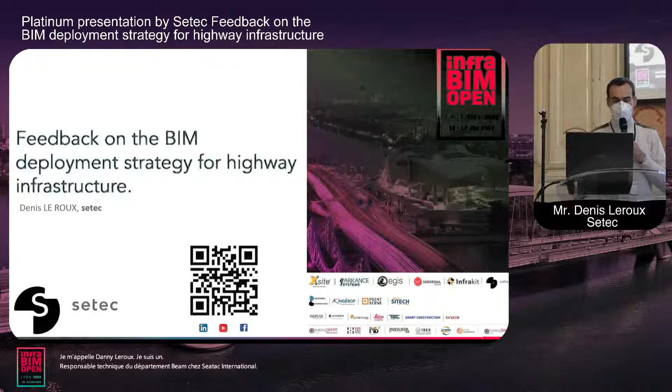So, first of all, who is Setec and what are we doing? Setec is an engineering company based in France, but we operate everywhere in the world, abroad. Our main aspect is that we always want to have value engineering and a new inventive way of doing things. We operate in transport and infrastructure, like bridges, highways, tunnels, metro, airports, and so on, and also in building, urban and land development.

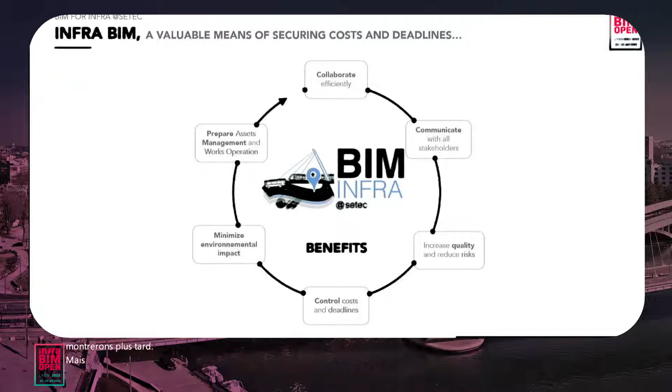So what's our strategy in BIM? Our strategy is to focus on the benefits of the project. This is feedback - we didn't start like this. We wanted to do BIM because we wanted to do BIM with a lot of things, you will see that later. But with experience, we really see that you have to focus on what kind of benefits you want from BIM on a specific project, and sometimes very little things can do a lot. So we have to focus on different aspects or topics: collaboration, interaction between people, life cycle, operating and maintenance, and so on.

Here, the client will begin a new project, okay? And then we'll have one or several design offices doing the preliminary design, then the scheme design - that's where we will do BIM models. But then we will have the contractor, and the contractor will have to redo the BIM model. So we have a big disruption, a big stop into the BIM process. This is very painful in many ways for BIM, okay, but that's it, that's how it works. So we have BIM models for designers and BIM models for contractors, and they are not the same, and we cannot give them the actual BIM model.

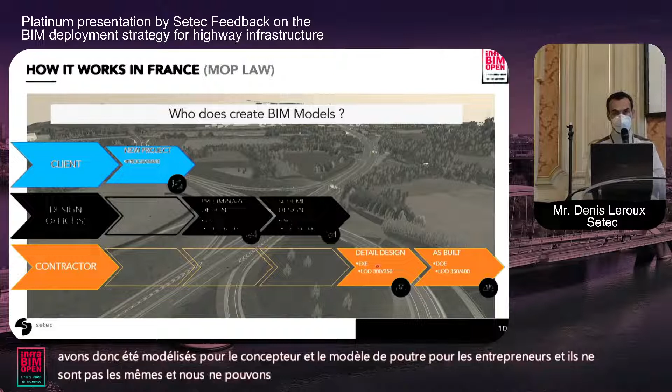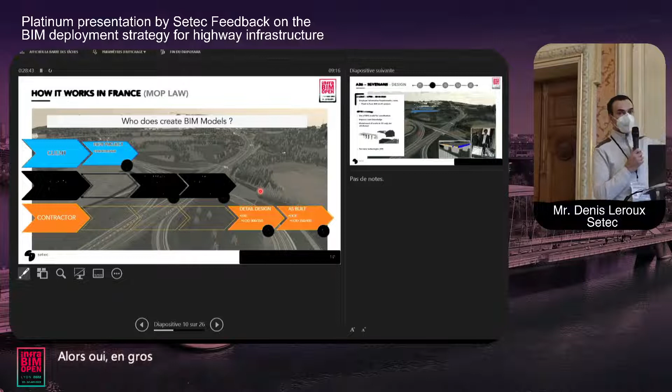They have to redo it. Oh come on, okay computer is down. Oh thank you very much, nice one. But wrong screen. So yes, basically we have a big stop into the BIM model, so we have to redo it. It costs a lot of time and a lot of money, of course.

The first project I will talk about is one of the first projects we did with a BIM process, from 2010 to 2015, to 2020. The employer's request was, I just want BIM on my project. So that was very vague and we didn't know where to go. So our strategy was to use BIM for collaboration and to improve our team's knowledge on BIM, because we were just beginners, we didn't know where to go. And we modeled almost everything at every stage, like bridges, roads, earthworks, but also landscape and trees and so on. And we wanted to test the BIM model for virtual reality.

The feedback on that is that at the time we didn't have IFC software, so the software were not able to produce IFC. We spent a lot of time translating our CAD model to BIM model, and a lot of 2D software didn't produce actual 3D. For traffic signs, we had to develop specific software to get the traffic sign information to do 3D models from that. That was very painful.

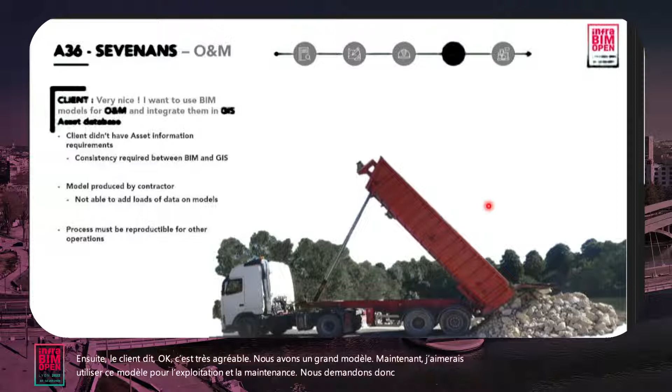Then the client says, okay, that's very nice, we have a BIM model now. I would like to use that model for operating and maintenance. So we asked the contractor to do BIM model during the construction phases. The client wanted as well to use those BIM models into GIS software and GIS database.

At the time, and still right now, the problem is that contractors may not all be ready to produce IFC, or to produce models with enough information or with the level of information required by the client. We did a big job with the client to be sure that all the information we put on the IFC models, the names of information, would be the exact same names we'd have on the GIS database. That was a quite good job for them and for us.

So the process we kept is that every single contractor will produce an IFC, let's say with just geometry in the IFC. Then they will produce Excel files saying that at such project or such part of the project, you have such or such information. Then all that information will be processed with FME, and FME will be based on our asset database, which was an actual Excel file. In that file we had all the information we had to tag into the IFC model. We get the Excel file, check that it's compliant with the database, and then push the data into the IFC.

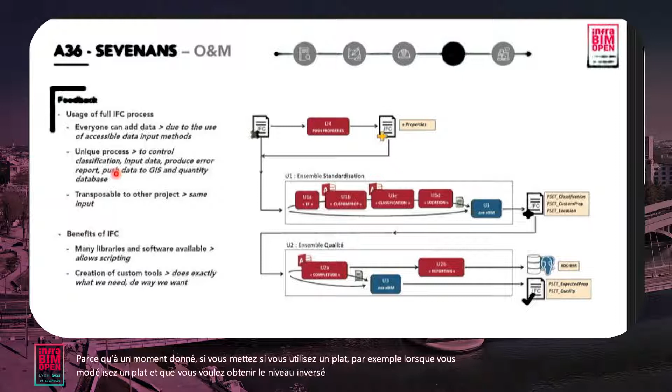At some point, if you use a ditch, for instance, when you model a ditch and you want to get the invert level of the ditch, you may not be able to retrieve it in GIS. It really depends on the way your software codes the geometry of the IFC for the ditch. If you have a BREP, basically you won't be able to get the invert level.

The benefit also of the IFC is that by the time we started in 2015, and this job was done later on, plenty of new community and new operators had to produce libraries to allow us to manipulate IFC in code and to automate processes.

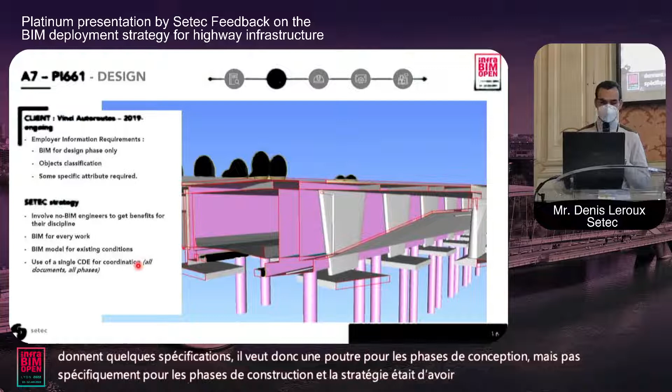Another project is with Vinci Autoroutes in 2019, and it's still ongoing. The project is under construction right now. This is a design process, and our client gave us some specifications. He wants BIM for design phases, but not specifically for construction phases. The strategy was to have a team working and meeting every week around the BIM model.

And also to involve non-BIM users into the BIM strategy, making them think about what BIM can bring to their discipline. Let's say in road pavement, we had a big issue, given the motorway is a two-way motorway, one up, one down.

The location of the project is in a turn, and the two sides of the motorway have a difference of level. The construction phasing for all the material pouring was very difficult because we had to bypass traffic for maintenance on the main bridge. So we had to produce a temporary bridge, route all the traffic there, then go back to the original position. All the pavement strategy and phases was designed with BIM, which worked very well.

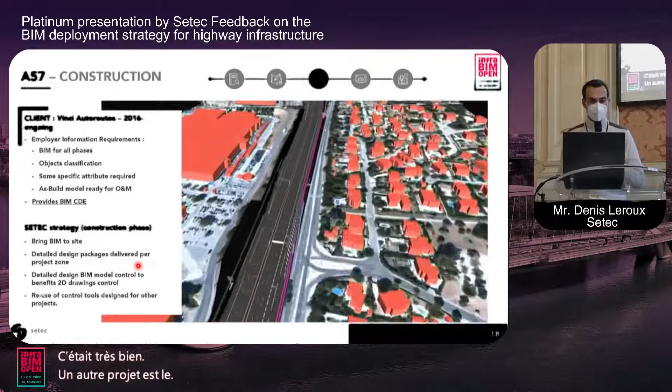Another project is the A57 in Toulon with Vinci Autoroutes. The client on that project provided the CDE. This is a big step for us because usually we had to manage and pay for the CDE, but there, as the client provided it, both designer and contractor were able to collaborate together. Our strategy was to bring BIM on site, and this kind of CDE platform is a big asset, so everyone can go there, look at the BIM model, add comments, and so on.

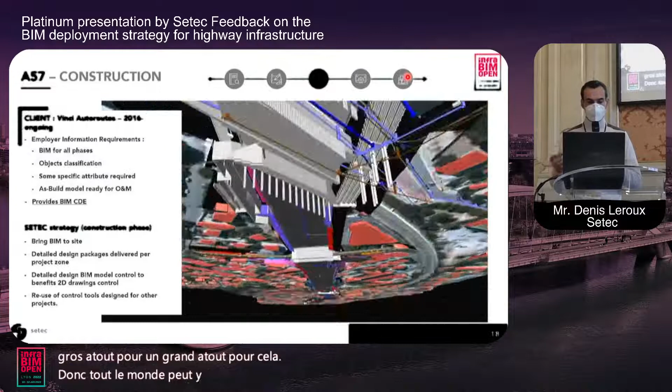We also tried virtual reality on site. This is quite good to be sure that every part of the project is laid at the correct location, and we did some controls that were very interesting with that.

So the feedback is that for detailed design, the use of BIM was very handy for us, because it was a large project with many networks to integrate.

The next step is the as-built model. This has to be done in real time, because if not, the data is lost. The big issue is to be sure you can collect data from site in nearly real time, and get that data to control your BIM model against the land survey of the existing condition on site.

Last thing, virtual reality is good at the start, but you really need someone who is an expert on site to launch that, for about one or two months.

What's next? In all the phases of the project, we see that site data is something very important. So our strategy is to try to think how we can process site data easier and quicker.

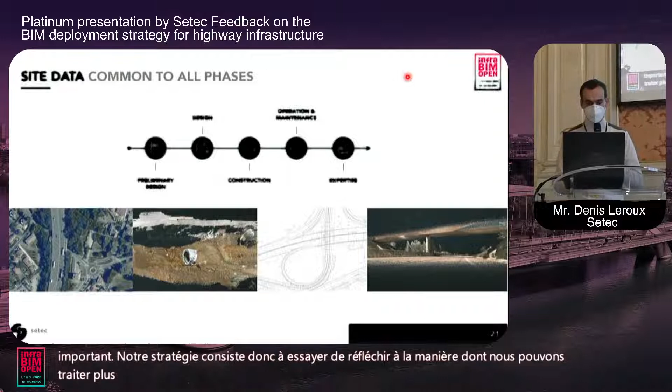To do that, Setec launched an R&D project with a new startup company. This project is based on two areas of knowledge: the startup has the knowledge of treatment of cloud points, and we have the knowledge of engineering, of what we can do with the cloud points and what we want to extract from them. So the project is to have a platform with a fully automated process.

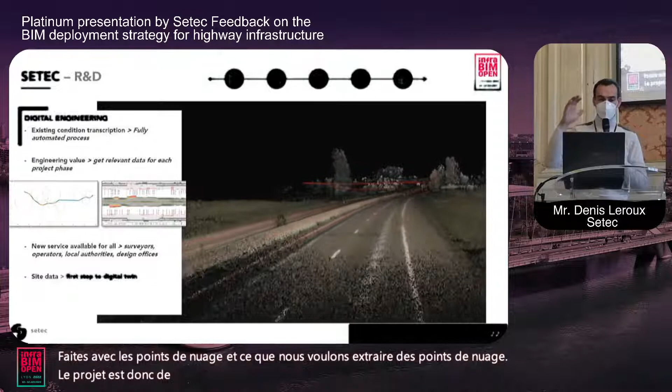So this is a test. This is our cloud point, we bought it. We just drop the cloud point in, press run, and the process will do the vectorization of every traffic line. You get a report of what kind of lane you have, what's the width of the lane, what's the crossfall of the lane, what's the width of the platform, and also you get the Land XML of the alignment.

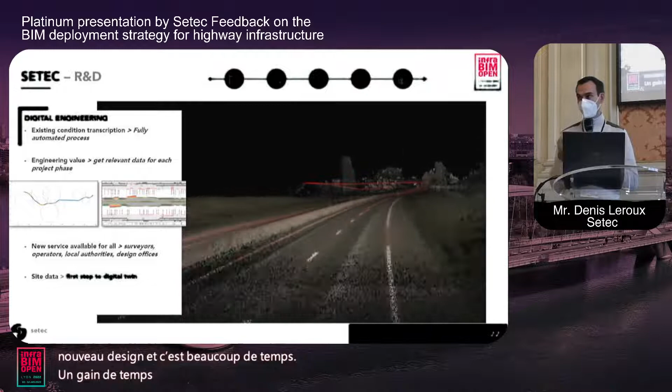This is something very new and very interesting for us, because we get the MMS survey, put that in the machine, and let's say two minutes later we have everything to start our new design. This is a big gain of time and a gain of accuracy as well, because we're sure that if there's a mistake somewhere, it's not because the guy doing the digitalization was a bit tired and clicked on the right instead of the left. It's something we'll have systematically because it's an algorithm, so if there's a problem, we'll have the same problem everywhere in the same location. We have to correct that and run it again.

So shortly, we will provide this new opportunity for whoever wants to use it. And this is, I hope, a good strategy.

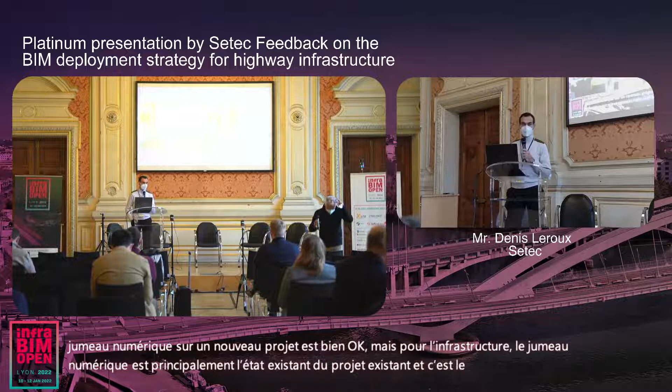Right now we are doing GIS information, a standard GIS on Land XML, because that was the first try. But surely we will soon go to IFC, and with the new version of IFC, I'm quite confident in the ability to quickly prepare a BIM model that will allow everyone to implement digital twin, because as you know, existing condition is the first step of digital twin. Digital twin on a new project is good, okay, but for infrastructure, digital twin is mainly about existing projects, existing conditions, and that's the big challenge for the next years - to acquire existing conditions and quickly move to a BIM model from those existing conditions.

Thank you very much. Okay, thank you very much to all for the questions.

So again, hello everyone, I'm Philippe Testard, I'm the speaker. I'm a BIM manager from Vinci Construction Grands Projets, and I've been the BIM manager for the Hampton Road project from 2020 to August 2021. My hobbies are board games, and I love to read a good manga.

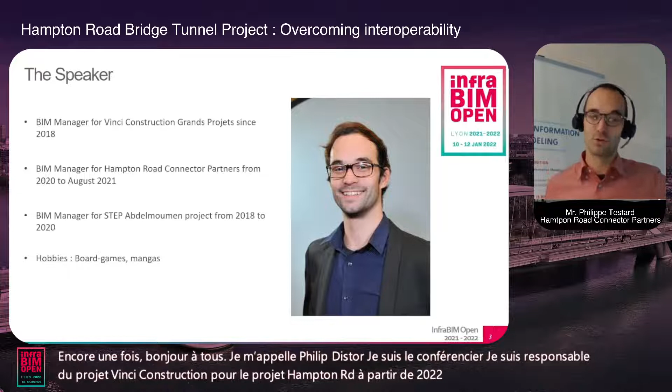So what we're going to see today: first the project's BIM context, the software's limitations which will lead us to interoperability and how we overcame them in this project, and then we'll continue with what the industry needs. First, a little context - the project happens in the east of the United States, in the state of Virginia, with Hampton to the north and Norfolk to the south.

There are two artificial islands existing, with bridges and tunnels connecting the two lands together. Let's see that with images, going from Hampton to Norfolk, showing the existing roadway and the existing bridges.

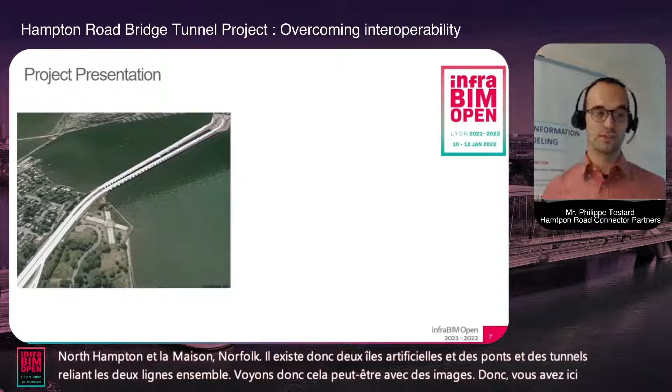On the North Trestle, we're going to demolish the existing bridges and build new ones, expanding the roadway and doubling the lanes that exist already.

Going forward, we arrive at the two existing tunnels with the two artificial islands built in the last century. We're going to expand these two artificial islands, the North Island a lot and the South Island a little more. On site, the North Island expansion is almost over, and we're going to build two tunnels under the water, adding more lanes to avoid traffic jams.

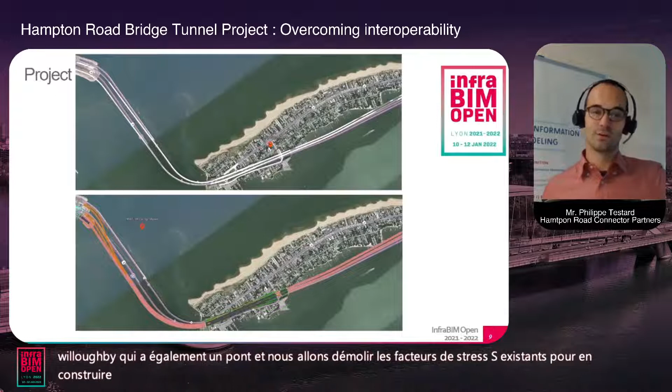On the South Trestle, from a top view, we see the existing bridges and the beginning of the Willoughby Bay, which also has a bridge. We're going to demolish the existing South Trestles to build new ones, again doubling the lanes, expand the existing roadway, and rehabilitate the Willoughby Bridge.

Arriving in Norfolk, we have the existing roadway, again doubling all lanes. This is all to avoid traffic jams, because people who live in Hampton work in Norfolk, and people who live in Norfolk work in Hampton, and everyone is blocked every morning and evening going to work and back home.

Now, what are the BIM requirements of this project? We need to provide 3D models of the proposed conditions and of the existing infrastructure, and from these models build 4D models for the client and all stakeholders. We also have to provide geometric as-built models at the end and integrate them within the client's GIS software.

What's important to notice is that 2D drawings do not need to be extracted from the 3D models, and the 4D models are mainly for communication purposes from the client's point of view, to share information about the project with all stakeholders.

Also, the clients want all models and deliverables to be within the Bentley environment and ask for the DGN format, which will lead to other topics.

In terms of organization, we have 3 companies forming the construction joint venture: Vinci, Dragados, and Flatiron, shown in blue in this graphic. There is also a design joint venture, shown in orange, which is Mott MacDonald and HDR.

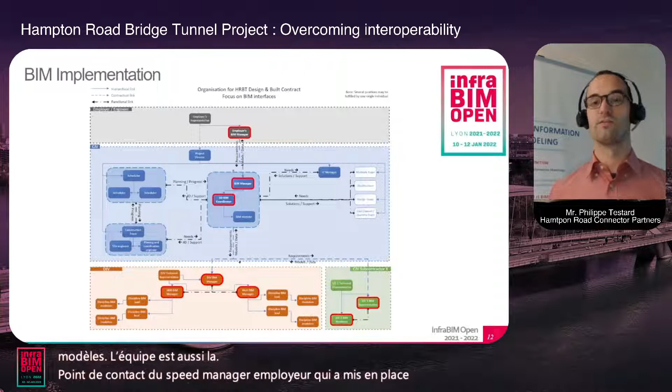Now, in terms of the main software architecture within the project, for modeling software for the permanent works, these are created by the designers within the Bentley environment using the V8i solutions, which is a requirement from the client, with OpenBridge Modeler, SS3, Geopak, AECOsim Building Designer, and we also started to use Connect versions of the Bentley products.

On the constructor side, we are more used to Autodesk products, so for temporary works and survey, Autodesk Revit and Autodesk Civil 3D are used.

For 4D production, in terms of scheduling, we use Primavera, which we import into Synchro Pro. Synchro Pro is the main software used to create the 4D models.

We have a bunch of web viewers to share information. FieldWire is used to share the 2D drawings approved for construction directly with site people. We share the 4D animations within Microsoft Stream, in a cloud environment, and we also share the 3D models with a web viewer called Vektor, which we will see in more detail later in the presentation.

Now let's jump into the topics of the presentation. First, the software limitations that define the context for the interoperability troubles we face between the softwares. One main limitation is that US Survey Feet is usually not supported by the software—you may not know what US Survey Feet is.

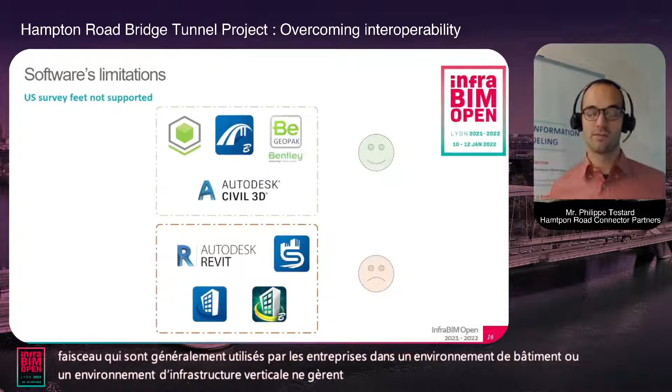All the infrastructure softwares like AutoCAD Civil 3D, OpenRoads, Geopak, InRoads can manage the US Survey Feet. They're really linear softwares, but all the BIM softwares usually used by companies in a building environment or vertical infrastructure environment do not handle the US Survey Feet, and it can have huge consequences. So how do we overcome that?

So we have a first process to handle this topic of units. This example on the screen is within the Bentley environment. If you have experience with these softwares, you know that there are a lot of files which are DGNs, because, for example, if you take a building, you can have one DGN per discipline and then per level.

So you already have a lot of working files. So you put them into a first container. All these working files, we're going to put into an international feet container, and then we need to convert into a US Survey Feet container. So the second one is the coordination models on the screen.

Then for that, the theory is that we extract all the plans, sections, elevations to create the sheets of the project in US Survey Feet. However, surprise, it doesn't work.

The software cannot handle really well the scaling factor, so we faced a lot of display issues creating the drawings of the project. We had to change the process a little bit, and we had to create the drawings directly from the international feet container, which is obviously not ideal.

Then we control the project points and make sure they are correct directly within the sheet, which are then in US Survey Feet. We have another container for the federated model in US Survey Feet for coordination. But this is not okay, this is not perfect, and this is not how it should work.

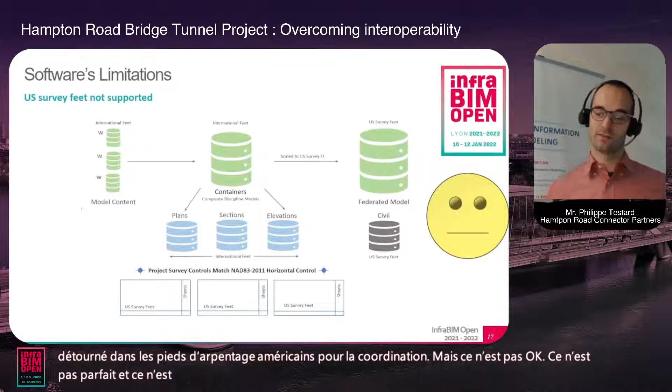Now, another software limitation is that softwares are not all capable of handling georeferencing. Most of them handle geolocation with local coordinates. It's the case, for example, for SynchroPro here.

If you take a model that's georeferenced, you will have trouble navigating into it. You will have display issues, and here is just a small example of how annoying it can be, with the difficulty to select elements, and the screen really shaking when you are trying to navigate around. So you have to make sure that you bring all the models closer to 0, 0, 0.

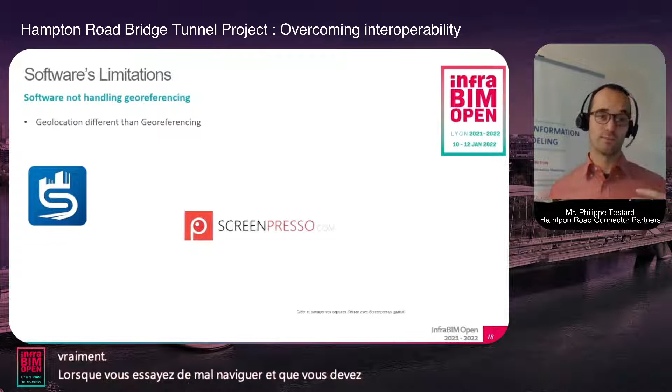There are many other software limitations, and I will cover some more here, but we don't have time to cover them all in detail. So first, the tunnels are modeled with Generative Components, which is the equivalent of Dynamo, but for Bentley products.

But the models are not georeferenced. Also, with Generative Components, the V8i products of Bentley are not powerful enough to generate the tunnels we had, so we had to pass with the Connect version, which was outside the contract.

Also in SynchroPro, nested files - if you export a container with a lot of reference files, Synchro has trouble sometimes handling these files when synchronizing. So that was an issue too, and I'm going to illustrate what kind of problems it creates.

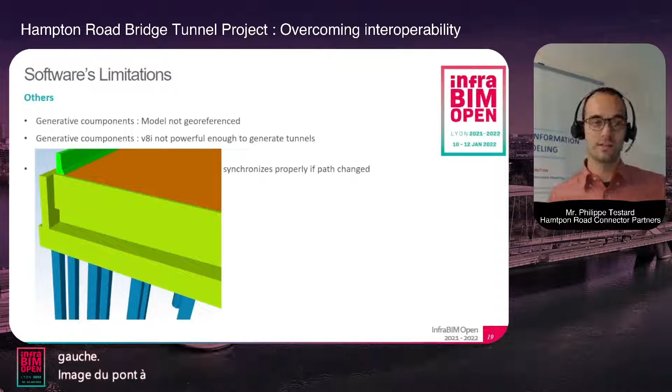So we have here on the left an image of a bridge again, where the elements are not selected, and when you select the element, you can see that the element is shifted, which is of course not okay. And you can imagine that it's not the only weird behavior you have.

Another one that was very annoying is that it's not possible to apply the scaling factor within V8i products that easily, because there were just too many numbers after the dot. So we had to open the Connect version of the Bentley product, apply the scale factor, and then go back to the V8i version to really have the models in the correct software with the correct unit.

And that leads to interoperability. We saw a lot of software limitation, and now we have to make sure that these models are correctly into the federated model, and that everyone can use them, the constructor and the designer, whatever is the original software. So it's really to overcome interoperability to answer the client's requirements once the model is into a DGN format.

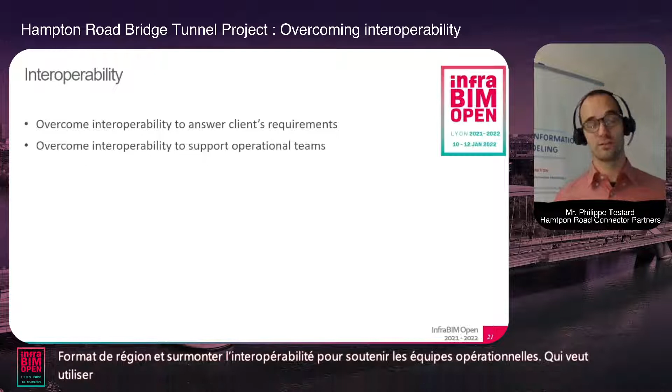And overcome the interoperability to support operational teams who want to use the models for temporary works and to create sequences and so on. So my recommendation is that at the beginning of a project, you start doing a big Excel file and you do a color code.

You look at the native model, its geometry and its data. You put it in the second software, you see how it arrives, and you try to define the best format to achieve this. And so with no surprise, on our own Excel file, there is a lot of red and black cells.

So for this presentation, we're going to focus on one complex interoperability process that we put in place, which is the Bentley Products to Synchro Pro. So for the permanent works, we're going to consider the OpenBridge, Geopak, and AECOsim Building Designer to Synchro Pro, considering all the software limitations we just saw.

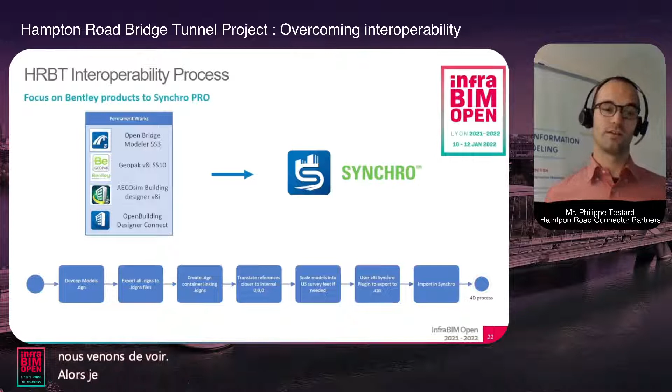So at the beginning, you need a model, so you have to develop your models, and then you have to export all the working files, which are a lot, to IDGN. IDGN is a closed format from the Bentley environment that allows you to see, from a Bentley viewer, the models with the correct geometry and the correct data.

If you open only a DGN as a standalone, you won't have all the data attached to the objects because it is not in its Bentley environment. That's why we asked the designer to export all the DGNs to IDGNs, down to the lowest breakdown structure.

We then create a DGN container linking all the IDGNs, and we transfer all these references closer to 0,0, because of course the models are georeferenced. So, because of the Synchro Pro limitation, we have to put them closer to 0,0.

We then have to scale the correct models coming from AECOsim or OpenBuilding Designer, because these softwares do not handle the US survey feet. And then we have to use the V8i Synchro plugin to export to a Synchro format the best way possible.

If you're familiar with Synchro, you may ask why we're not using the Connect plugin, which is more recent and supposed to work better with the latest technology. Well, it actually doesn't work properly, at least in our case with the software on this project, so we had to stay with the old technology, which won't be supported by Bentley by the end of the year. But we managed to put them all into Synchro.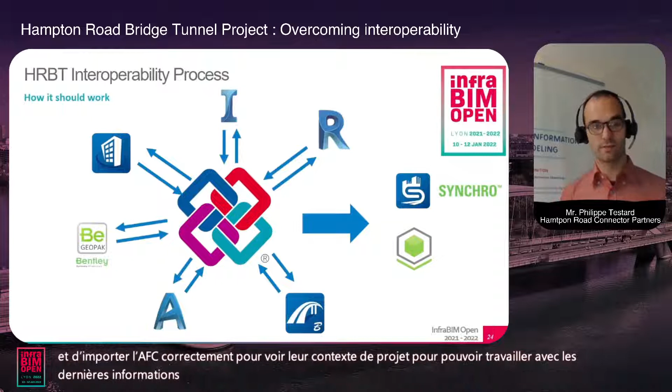The goal is not to have to learn every software in the world, but to use a software that fits your design office or your construction operation task, and use them because you need it.

Now let's talk about the level of information need. There are standards in the industry, especially for the building environment, so we can look at the BIM forum or the NBS BIM toolkit. But when you look at infrastructure, for tunnels, for example, they say to look at global definition, or they're not even defined in the case of the NBS BIM toolkit.

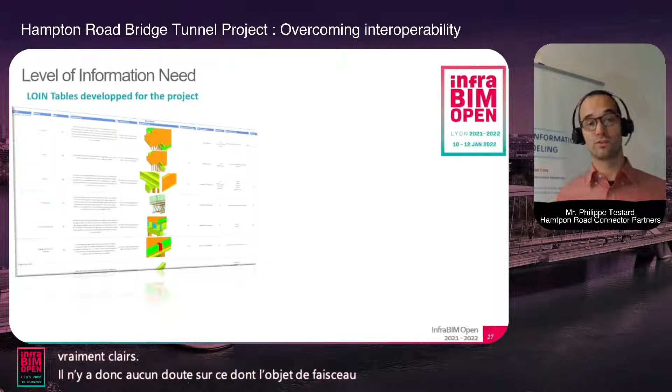So at the beginning of an infrastructure project, you have to develop your own level of information need tables for the project. That's what we did, and you need to make them really clear so there is no doubt on what BIM object needs to be delivered, what their 3D representation is supposed to be, what the modeling scope is, what data is required for each object, and when they're due.

Consider also that in the infrastructure industry, everyone is not mature at the same level in terms of BIM, and having a really clear level of information table helps everyone in the project understand what they can expect for different phases of the project to find in the BIM models.

So what does the industry need? I think we already partially answered that. We need a common format, an IFC format, that's mature for infrastructure and currently being developed. We need standards for infrastructure that make sure everyone can deliver the BIM models with the correct objects and the correct information. We need owners to not close the environment, and instead have an open environment so everyone can work with their own tools to deliver their best work.

We have, for example, buildingSMART. We have to participate in groups of work like that to develop these elements. But most of all, we also need something else.

We need editors to work together. I know they're competitors, but they should work together so we can use the software we prefer, that fits best for our needs. There is no single editor in the market capable of producing all the software that fits your specific needs. So you need to use the software you're best at, and be able to use the models that everyone can provide you with a common format.

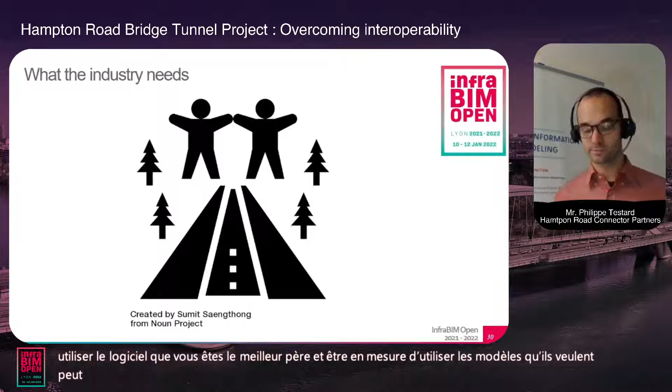When all of this is achieved, I think I will be able to sleep like my cat, and I will have no trouble going back home, and she'll stop complaining.

But now, let's see the final results of the project. It's time to awake your inner cat and look at close details of what we managed to achieve despite all this software's limitations. Here there is a 4D means and methods.

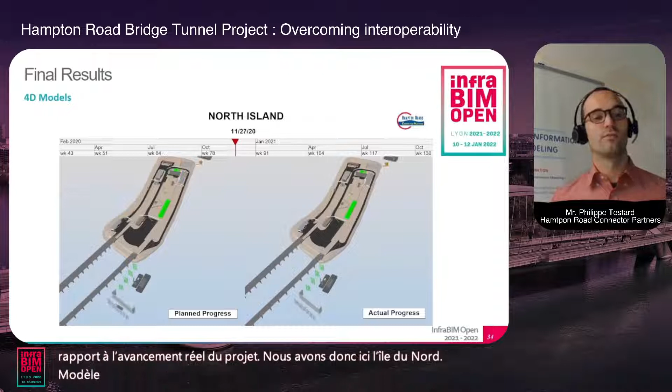We also do 4D models at the schedule level to compare what is planned versus the real progress of the project. Here we have the North Island 4D model for the schedule, and we can see on the left the planned progress and on the right the actual progress, so you can see and compare the progress.

I cut the video a bit so it would look more smooth, but now on site it's actually finished.

And now we allowed all the teams to access the BIM models through a web viewer, which is reading all kinds of GIS formats and IFC as well in terms of 3D modeling. It's really an infrastructure viewer, so it handles all kinds of coordinate systems and applies them properly to the model. So we can see here the whole project.

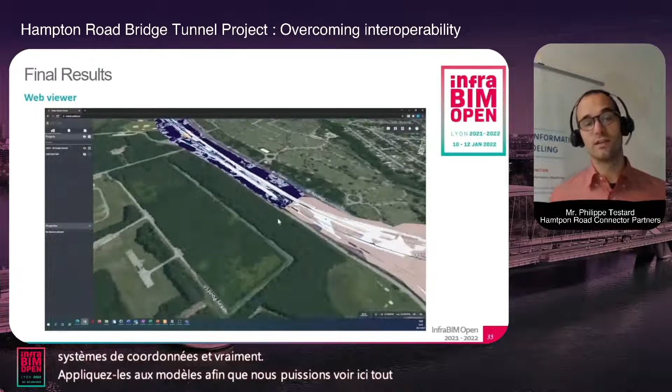It's also a really good viewer because it allows you to select all the alignments of the project and directly create a cross-section for the teams to review the project, which is rare in the industry today. So by clicking on two elements, the software calculates a cross-section, and you can see what is supposed to be at the station you want.

You can slide this cross-section to explore wherever you want on the project, and the software will calculate on the cloud again—the more objects there are, the longer it takes. You can also navigate directly by entering the stations of the project. This is really useful, especially in a linear project like this one.

So to conclude, I hope you have a good overview of what we did on the HRBT project. I put here, if you're more interested, a YouTube link that allows you to see the progress on site every month by drone. Happy conference.

Okay Philippe, welcome, thank you for the presentation. Very good presentation, thank you to you.

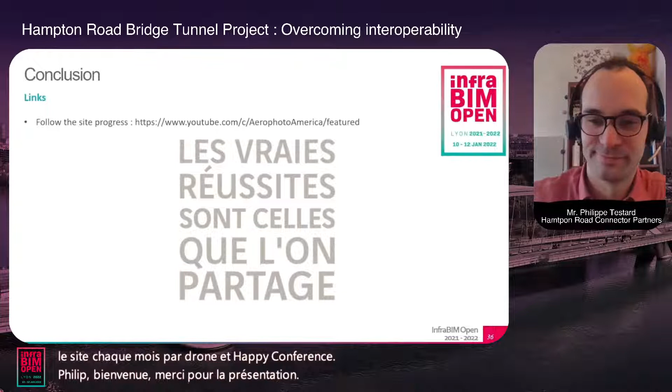So now a few moments for questions from the room and from Brella. On the screen, it's possible to have Tina also. If there is a question in the room, speak up. No questions? Tina, do you have questions from Brella? There is no... actually, one question from Brella is: what was the web viewer that was used?

So the web viewer that was used is called Vektor.io, from a Finland company. We really chose this viewer because it has infrastructure capabilities to do cross-section and large data sections directly online. This is very useful for the roadway teams to navigate through the models with this feature. On the industry market, there are only two viewers doing this: the iTwin from Bentley, and this one.

And that is the viewer used. It allows you also the things that viewers do, like classical sections as well. And you can also classify according to the data and do filters and so on.

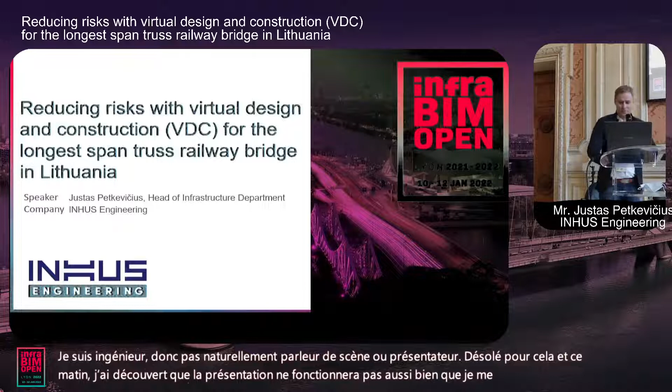Sorry, can you hear me? It's a long one, but the key message is you can reduce your risks in construction with virtual design and construction, shortly VDC. In this presentation you will see a real case, less theory, more practical things, small things we incorporated in our work processes. I'll try to highlight a few project solutions which, in my opinion, correspond quite well to yesterday's opening session. I'm an engineer, so not a natural-born stage talker or presenter, sorry for that. This morning I discovered the presentation won't work as properly as I thought on this big screen, but I hope it will be okay.

To better understand our background and experience, let me introduce our company. We are part of a company group, INHUS, which is together involved in design-build projects in Scandinavia and the local Lithuanian market. INHUS itself is focused on the structural part of a building, as a designer, manufacturer, and assembler. We, INHUS Engineering, are the structural design part of this process. Our team is more than 120 engineers, and we are one of the biggest structural engineering companies from the Baltic states.

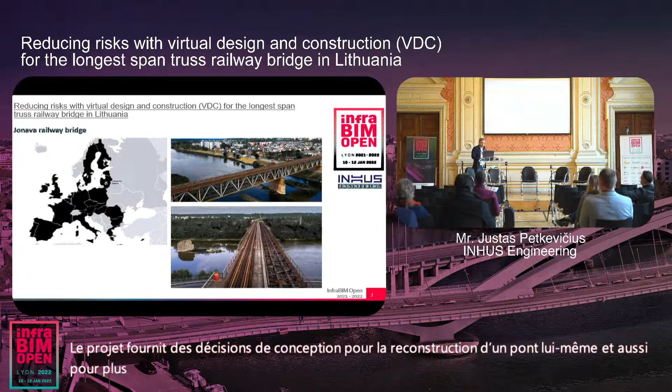Today I will present one of our infrastructure projects. It's a railway bridge on the main Lithuanian railway line, connecting the capital city Vilnius to the Lithuanian port Klaipėda. The project provides design decisions for reconstruction of the bridge itself, and also for more than 1 kilometer length construction of the railway line, and reconstruction of communication and electronic networks.

Here you can see how the existing bridge looks like. There are 2 decks: one is in use, the other is not in use because of limitation of its bearing capacity, it's not sufficient for these days' loading. One of the main challenges of this project is that the construction work is done near an operating railway line, and the intensity of trains is more than 50 trains per day.

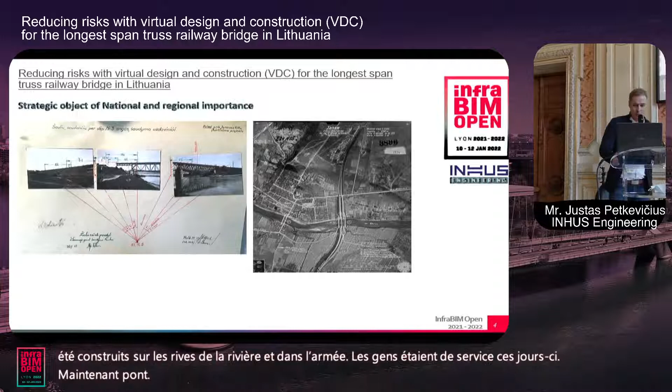The railway line and bridge itself is a strategic object of regional importance. The bridge has been identified as that from the beginning of its history. Guard shelters were built on both banks of the river, and army people were on duty in those days. Now the bridge is secured in other ways. The importance of the bridge is also shown by an aerial photo taken during World War II by German forces.

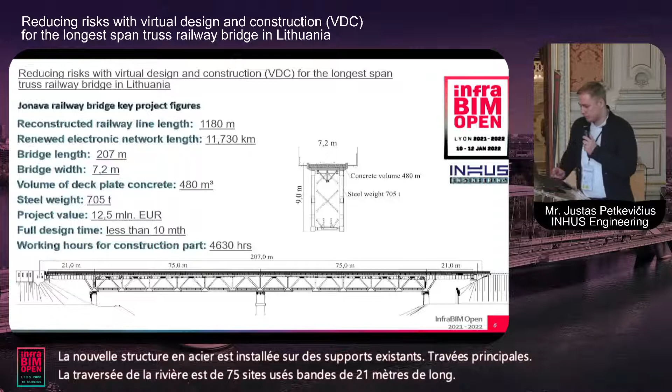The new steel structure is installed on existing supports. The main span crossing the river is 75 meters, side spans are 21 meters long, with a total length over 207 meters. The new steel structure is designed on the ballast track on a concrete slab. Once the project is implemented, trains can go through at up to 160 kilometers per hour.

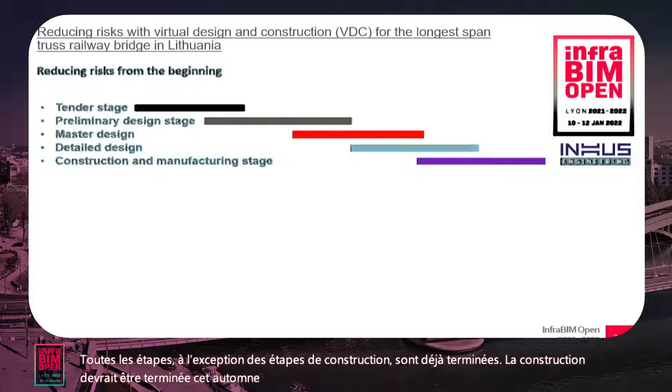The presentation is divided into parts corresponding to the project parts and stages. All stages except construction are already done. Construction should be done this autumn. You can identify which stage I'm talking about by the colors on the right side of the slide.

The client, LTG Infra, a Lithuanian railway company, decided to choose the design-build principle for purchasing this project. This is not common in Lithuania, but in our opinion it's the most efficient and effective way of purchasing the project. This allowed the project team to come together at a very early stage.

The contractor joint venture is Eurovia and LNK Industries, the designer is Inhus Engineering, with partners Sweco Lithuania and FIMA. Implementation of BIM was a novelty for the client as well as the contractor. This was the first project in BIM for LTG Infra, and we are glad that Inhus Engineering's experience in this area led the project team and partners to believe in a high level of success using BIM technology.

In preparation for the tender, the contractor and designers prepared the concept for the construction of the bridge and railway line. For verification of the concept, finite element calculations were made, and a preliminary 3D model was also made. From that model, we took material quantities, and smaller technical decisions were made. All this material was given to the contractor, who was able to rely on it to collect a price for the tender with an estimated lower risk of contingencies.

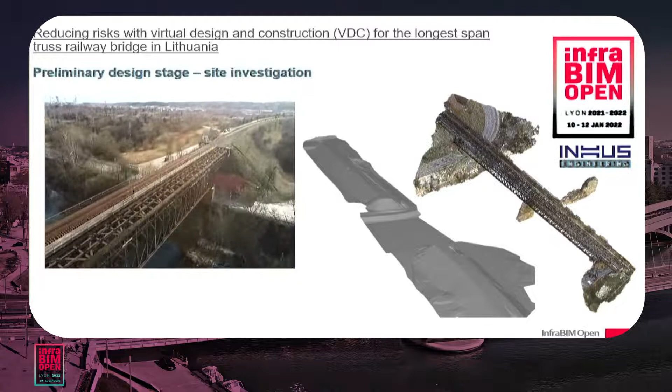To assess the current situation, geodetic measures and scanning of the project area were made. 3D surfaces, 3D lines, and point clouds were made for the design. This led us to avoid costly, and sometimes in this case dangerous, measures in the field.

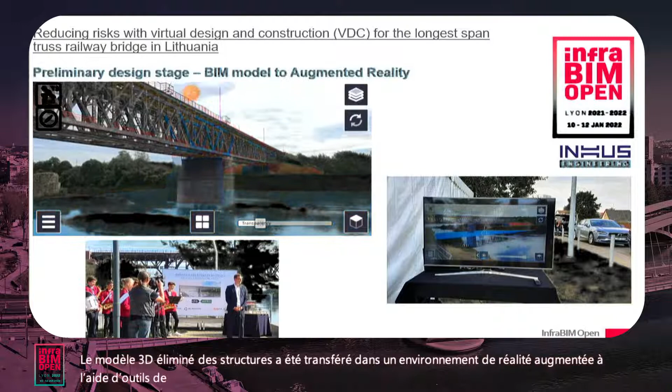Augmented reality was used to verify design solutions at the preliminary design stage. The preliminary 3D model of the structures was transferred to the augmented reality environment with the help of Site Vision tools. This inspection allowed us to timely adjust solutions that intersected with remaining structures. Also, using augmented reality, the local society was introduced to the project.

At the preliminary stage of design, environmental pollution research and modeling was done to reduce the environmental impact of noise. Additional measures were made and also modeled in the model.

Prior to the start of the design process, the BIM execution plan was developed and the requirements were agreed between project participants. The agreed rules made it easy to link parts of the project to each other and check their compatibility.

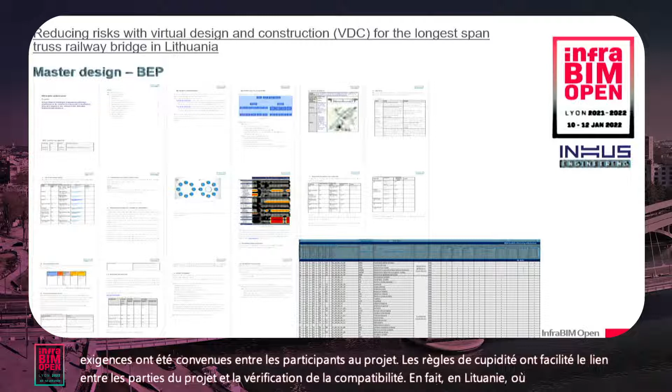Actually, in Lithuania there was no practice and norms for how projects should be prepared in the BIM environment, especially in infrastructure projects. Therefore, in preparing those documents, we mainly relied on foreign experience and experience in the building sector.

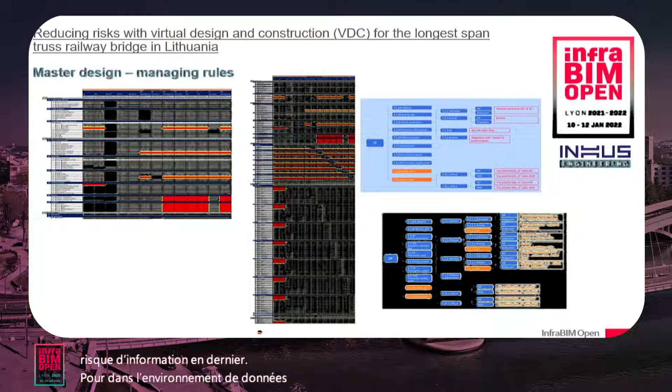Aside from the BEP, a common data environment was created, and the platform chosen was Trimble Connect. The CDE environment and the separation and empowerment of user groups led us to reduce the risk of information loss. In the common data environment, the relevant documents were also attached to the BIM model - I will show it later how it was done - to ensure the use of relevant information and eliminate the risk of using old information.

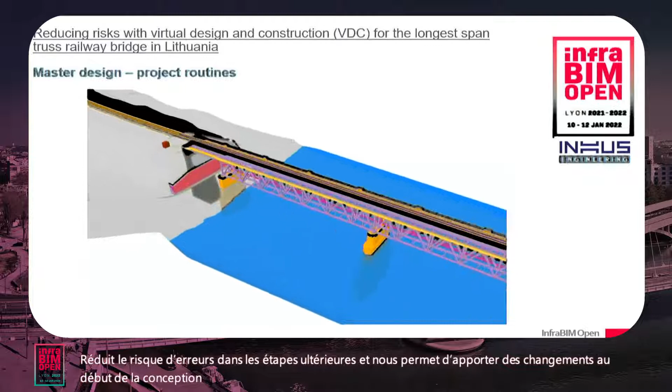Constant project checks, meetings with the project team and contractor, and element clash checks lowered the risk of mistakes in further stages and allowed us to make changes at an early stage of design. Our modest experience has shown that the full potential of BIM cannot be reached without constant supervision and strict process routines.

The model of the bridge structure was prepared using Tekla Structures software, with a level of detail of 400. This means all inserts, reinforcement, connections of steel structures, waterproofing, and other elements were modeled with precise geometry. For manufacturing, the steel truss was modeled with a precamber of 120 millimeters, set taking into account dead load, live load models, and manufacturing tolerances. We also needed to consider the admissible ballast height range.

Bridge deck calculation was made with the finite element software Midas Civil. Connections were calculated with Idea Statica. All structural calculations were performed by estimating the installation stages and simulating the construction process.

The railway part was designed using Autodesk Civil 3D software. Parametrical design tools were used to speed up the project delivery. All input information was used from 3D scan to create more accurate project surfaces, and this allows more precise estimation of groundworks.

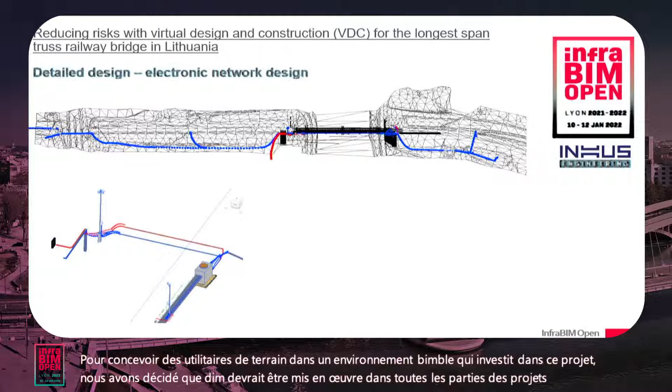In Lithuania, there is no practice to design field utilities in BIM environment, but with this project, we decided that BIM should be implemented in all parts of the project. So the electric and communication network parts were modeled also in 3D with Revit software.

It was agreed with all project participants how the element parameters are named and what units of measurement they are presented in. In this way, the information in the model was shown in the same way for all participants, and this eliminates misunderstandings for them.

Tekla Structure software allows information to be automatically assigned to elements. Then the BIM model is classified correctly by internal company classification. This function allows us to easily reclassify and assign parameters needed from a client, and not be strict in one parameter. In order to meet customers' needs, we can quickly reclassify the model. In this case, we use Uniclass 2015 for the unified classification system.

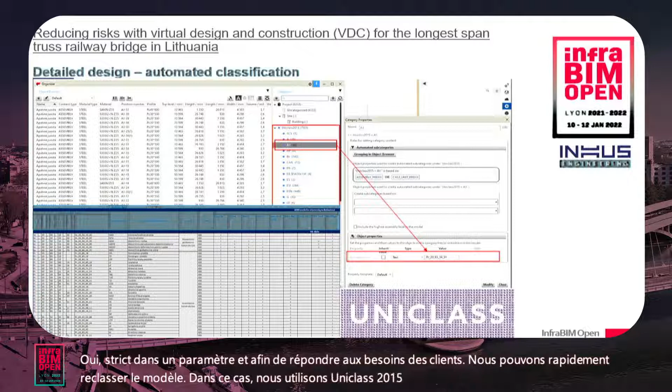I'm not familiar with the requirements of your countries, but in Lithuania, one of the main documents from a financial point of view for a contractor and a client is the table with quantities of materials needed. So all quantities of material from different parts of the project were linked in the BIM model and easily accessible in CDE. Also, CDE allows filtration using various attributes, in this case by the material group which corresponds to the project table of quantities.

The last revision document is attached to the elements of a model, so the information is easily accessible to all project participants, and there is low risk that irrelevant documentation will be used in manufacturing or construction.

For project construction planning and management, the project execution schedule is linked to the BIM model using the Bexel Manager tool. Here you can see the schedule in dates.

The BIM linking process works automatically, so if there is a change in the model, there is no need for human work. It's lowering the risk of mistakes.

In CDE, it is also possible to assign status of elements from manufactured to assembled. That allows us to visualize the construction process. Also, the status of elements is linked to the project management tool, Bexel Manager.

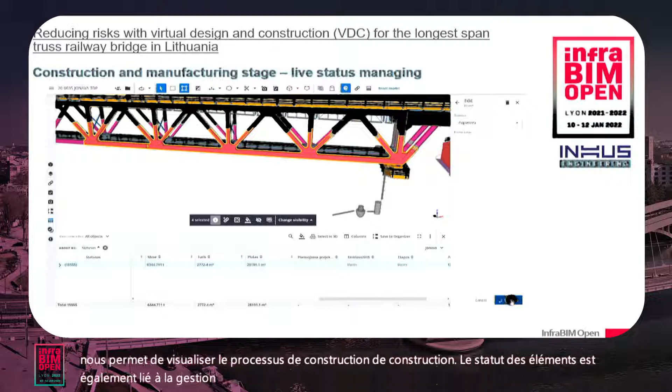One of the key moments of the project was choosing construction technology. The selected technology led us to avoid unnecessary intervention in the river. Also, it leads to reduced resources and materials for the contractor, because the existing structure was used instead of temporary new steel structures.

The uniqueness of the technology is that the old and new trusses are launched together. So on one side, the new structure is assembled, while at the other bank, the old structure is dismantled. For this purpose, connection joints between the new and old structures were made.

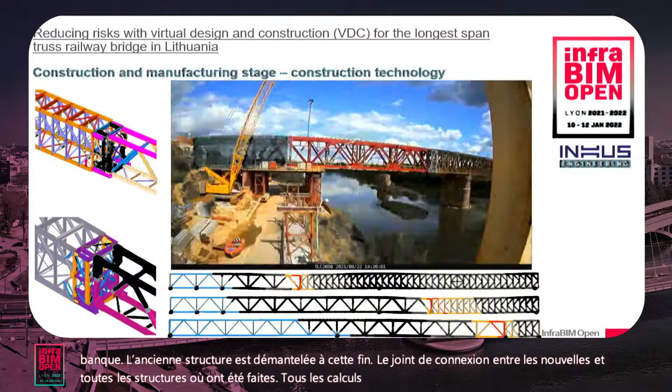All calculations were made in a finite element program, and all added elements were modeled in Tekla software. This is, I think, a good example of how a simple engineering solution and digital technology can lower CO2 emissions in construction and can make a profit in your business.

The project digital model was used in manufacturing steel structures. Steel structures from Tekla software were imported to SolidWorks. In the SolidWorks environment, the model was detailed to the requirements of manufacturing, and detailed manufacturing drawings were made.

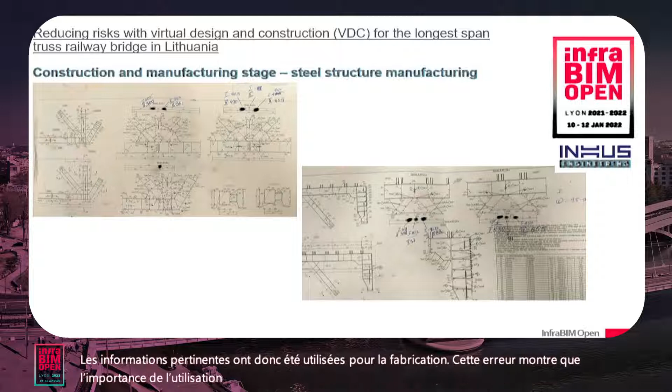During the manufacturing process, some information was not used in the BIM environment, and that complicated managing the changes in the project. So relevant information was used for manufacturing. This error shows the importance of BIM usage in all project parts and stages, especially in tight design-build schedules.

The manufacturing error was identified in the geometric inspection process. Here you can see it in the picture. Also, partial assembly of neighboring sections of the truss was made at the manufacturing place to ensure proper assembly at the site.

In order to ensure the quality of groundworks, the design surfaces were transferred to machines with automatic control. This assures maximum compliance of project levels and coordinates, and lowers the risk of human error while minimizing the possibility of additional groundworks.

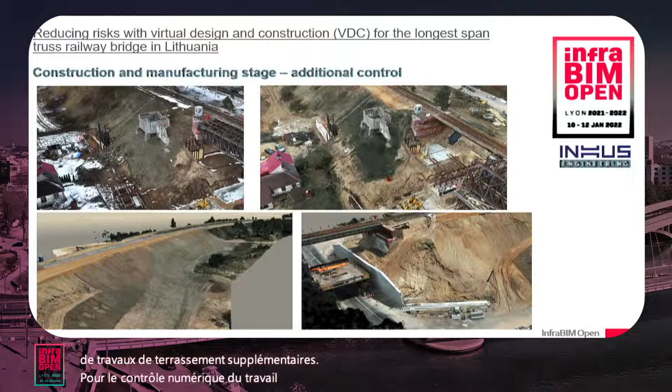For digital groundwork control, drone scans were made regularly, and the results were compared with the BIM model.

Additional control was done also in the structural part. Here you can see retaining wall scanning and comparing with the model. For the truss position control, geodetic measures were made after each launching stage. Partial scanning was made to see if manufacturing and construction tolerances corresponded to the requirements of the project.

And final question: does it make the difference for other construction parties? Let's hear from them.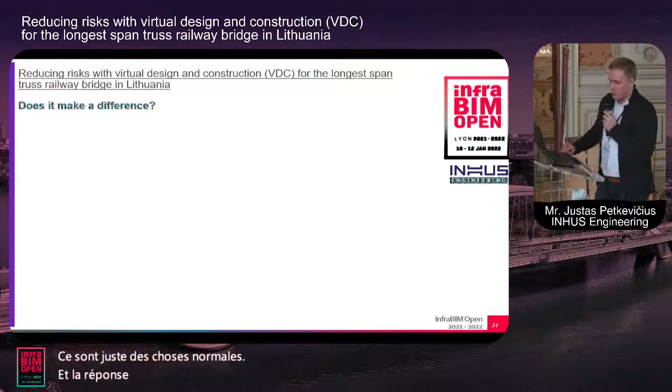And the answer, I think, it definitely does make the difference for all parts of the project. Once more, I want to thank all our partners for the courage and belief in us and the BIM process. We believe it can be the new standard of project implementation in the Lithuanian market.

Here you can see my colleagues, part of the design team. For deeper and more detailed questions, please find them in the hall. And thank you for your attention.

Thank you very much for this presentation. So interesting. Tina, okay, you're here, the room also.

So Tina, do you have a question from Brella? There are no questions from Brella. I'm not sure if there is any question from the audience in the room. Okay, the audience? Okay, one question. That's good.

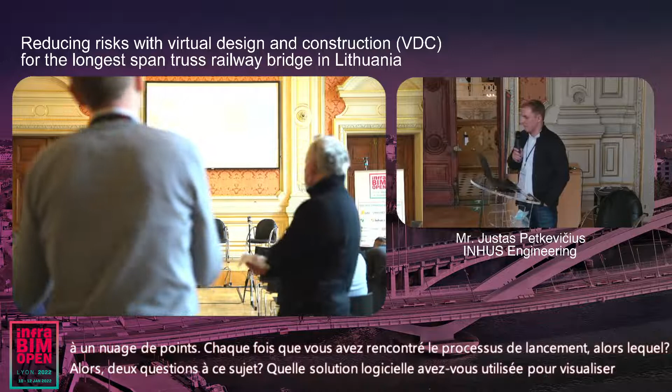Thank you for the presentation. So you mentioned that you compared the BIM model to a point cloud each time you made the launching process. So, two questions about that. Which software solution did you use to view and make the comparison? And my second question, was it a visual comparison, or did you use inspection tools to measure the deviations?

No, we didn't compare the point cloud. We compared the exact points measured with geodetic technology, and it was checked by visual inspection.

Okay, okay for you. Another one? Or comments? Tina, something on Brella, or in your head? Nothing in Brella, but I have a question, of course.

What about the data that you have collected now? Is it mandatory to transfer it to some client database, for bridge maintenance for example? In this case, as I said, we didn't have requirements from the client, so we will give all the data collected in the common data environment to the client, and the client will afterwards choose what to do with this data.

Another one? The last one, Tina?

Yes, perfect. Show that. Okay, perfect, thank you very much.

Okay, so I hope I can speed up my presentation so we can then get to coffee break. I'm Rauno Heikkilä from University of Oulu, Finland, and the topic today is development of road infrastructure digital tools within Nordic construction education curriculum. That's the topic, and I need to use the arrows to move forward.

That is not changing the slide due to some reason. I'm working as a professor at the university, in the research area of digital construction and mining operation. So far, around 25 years had research program in...

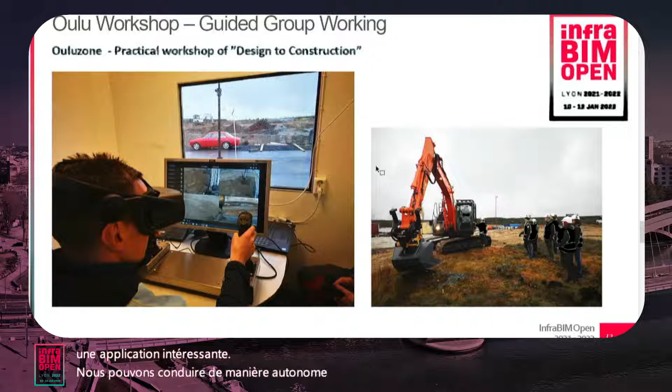environments for each student, where we also utilize the BIM models in the VR user interface. They can see that using the guidance principle and utilize it that way. That is also an interesting application. Also, we can drive autonomously without a human operator at all, that machine, based on BIM models.

Going to the results of the workshop, that was the first one, and we got some feedback. Everything was not working without any problems, and we gained some understanding of how to develop the education forward, next aiming to the Jönköping second workshop.

But the feedback from students was very positive. I think they mostly liked the international collaboration with foreign students together, and also the focus on training modeling really on a real project, which was found to be very nice.

and interesting task, and the model sharing with Quadri cloud service worked very well, with no difficulties found with Novapoint modeling. Actually, they did not go to very detailed modeling levels, but tested mostly road surfaces and road geometry modeling with the motorway alignment, and also some ramp additions to the main geometry.

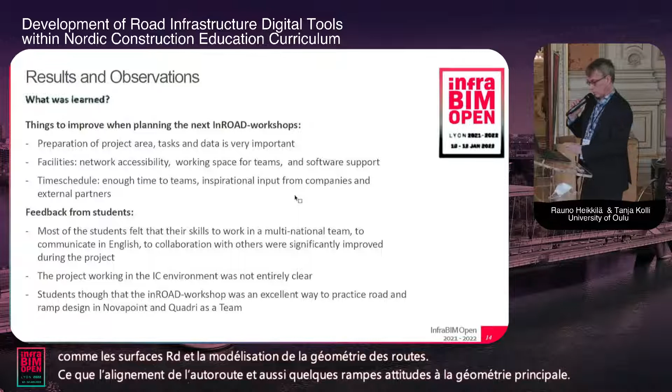And they hope to get clearer guidance for team working, which we will try to improve in the next Jönköping workshop.

As some concluding words: some crystallization of initial data and clarification of the modeling tasks. We hope to give students a better schedule management guidance, so they can collaborate as a team, maybe select their own project manager, set their own schedule, collaborate together, and divide the different tasks within their team.

And some technology and demonstration additions we are still considering for the next Jönköping workshop. We are going to test remotely driving an excavator from Sweden to Oulu, Finland, and let's see how that will work.

And also have one site visit, if possible, to some contractor areas in Sweden, to introduce real construction design and construction process examples, that kind of thing.

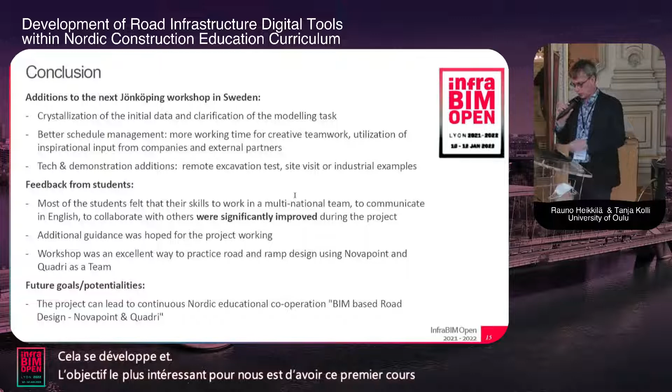And the software worked very well with no problems, though we still need Trimble support in these developments. I think the most interesting aim for us is to have the first international course in BIM-based road design, and to continuously collaborate with these Nordic countries.

And here's the last picture of our student and teacher group. For the next workshop, Finland will select the same student, but the other countries will select new students, and that way we continue our improvements. Thank you very much for your attention.

Thank you. Thank you very much. So, Tina, the room, is there any questions? No questions? There is no question since... but I can ask one quick question, of course. Okay, of course, yes, thanks.

Will there be some publication after the research project is done? Or will you publish some report, or where can we find maybe some recommendations for project teams, for example?

Yes, we will definitely have a project report after we have concluded our research project, but the schedule was in 2023, September, something like that, and that is the time we will deliver the project report.